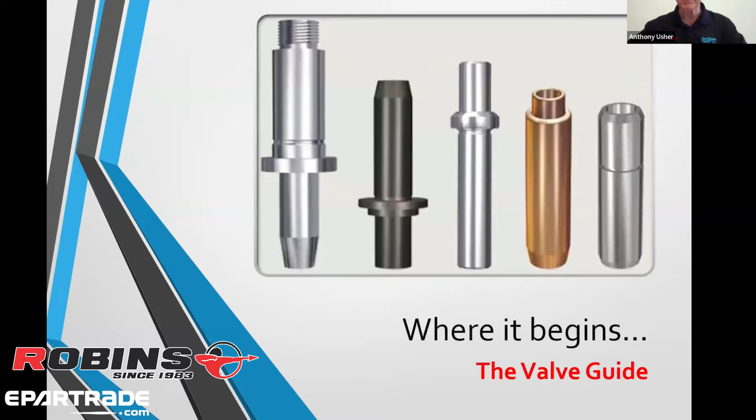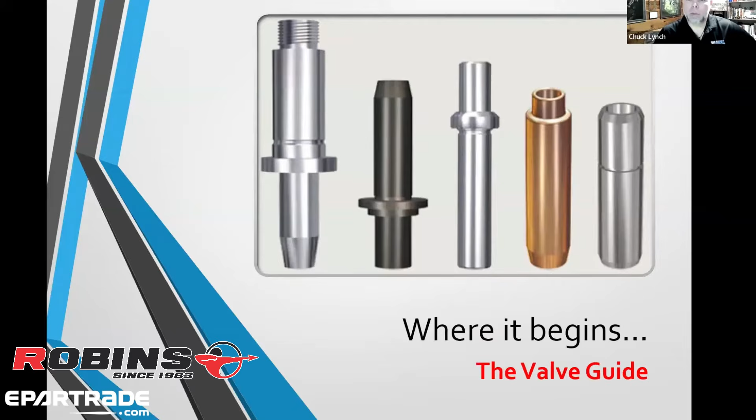Chuck, I think you know a lot about valve guides, and perhaps you want to get things started with a little explanation about the valve guide. Absolutely. So, as the title states, that's where it begins. We always have to have a datum point for anything we're machining, correct? And it cannot be more important to the longevity of the valve seat that the valve guide actually control that. You can't produce accurate valve seats if you don't have a very, very accurate guide to begin with.

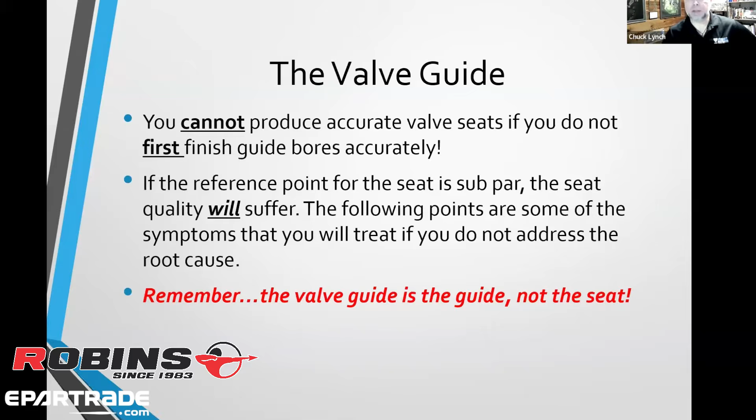It's the reference point. So many times in machining, we look at things like head gasket locating dowels, or the dowel pin that locates the transmission. There always has to be a reference point. The crankshaft center line is super important to the block. But when we think about the valve being able to seal combustion, we have to have that great reference point of the valve guide. So remember, the guide is the guide, not the seat. That's where we sometimes falter in our machining practices. We don't spend enough effort on making a good guide, so we go and cut the seat. The machines will cut the seat, but it won't be the reference we need, and then we can have excessive runout and so forth.

When machining the guide bore, it should be finished without any tearing of material, which means good tools. You do not want out of round or taper. The desired method to finish the guide is honing, because reamers just follow the path that they're given. So you bore or ream initially, then do the really close tolerance finishing. In all machining, like with crankshafts or camshafts, we rough grind and then finish grind, then polish or lap. That's kind of what you're doing with the valve guide when you do a finish hone. It's just truing up the surfaces, same as with a crankshaft housing bore.

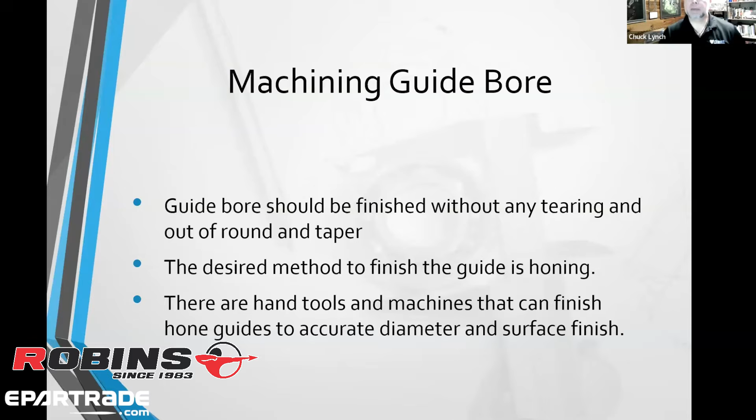There are hand tools and machines that can finish hone guides to an accurate diameter and surface finish. Anthony can definitely speak to that, since that's something they've put a ton of effort into in the past few years. Yeah, at Robins we've been working on developing valve guide finishing machines for quite a few years now, and we have a number of machines out in the marketplace with different types of engine builders using them. This particular machine shown in this picture is able to do all the different kinds of valve guide work.

Some people are oversizing existing valve guides by 4, 6, or 8 thou. Some heads don't have removable valve guides, so this machine is able to core drill out the parent material so that valve guides can be installed. And then, of course, the final process of honing the valve guide is done as well.

We have some users of this machine who are starting to use cross-hatch finishing inside the bore of the valve guides. We're hearing people are able to reduce the clearance between the valve stem and the valve guide because they're able to control not only the diameter of the valve guide, but also its surface finish. The less clearance between the valve stem and the valve guide, the better valve control, the better performance, and of course the longevity of the valve guide and valve stem.

Yeah, absolutely, because straightness is paramount. I know you've done a lot of presentations on cylinder bores, and we talk about measuring cylindricity. A bore gauge is a 2-point method. I can measure diameter, but I could never truly measure if that guide was banana shaped. That's one of the conflicts with just reaming, is that you can produce banana shaped holes. So imagine if it's banana shaped and I have a big long valve stem going through it, there are going to be points of contact.

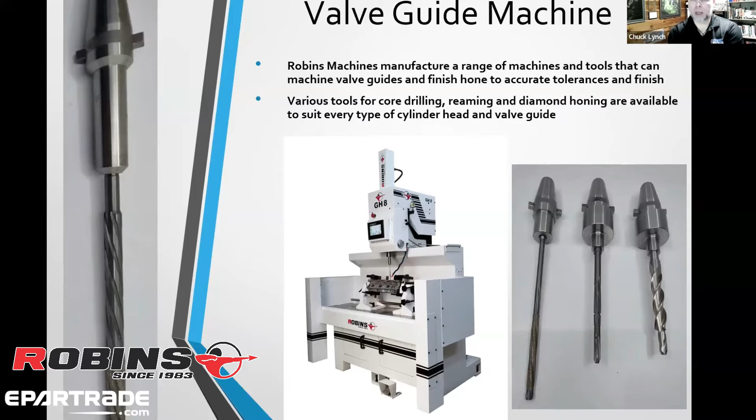Okay, well, let's go on and talk about the valve seat and some of the details on what goes on in the valve seat. Chuck, would you like to take this?

Sure thing. So the purpose of the valve seat is combustion seal. In the performance world, they take advantage of that with some very, very high seat angles, like 55 degrees. What that does is increase the wedging opportunity of the valve to the seat, which increases the opportunity to make a seal, a very fine line contact. But the downside is the valve can actually want to stick in the seat if the materials aren't matched. Again, that's very common in the performance world.

Secondly, you want to transfer the heat from the valve head into the casting. So going back to that guide, that's going to help you control the valve seat runout or concentricity, which is paramount in that transfer of heat.

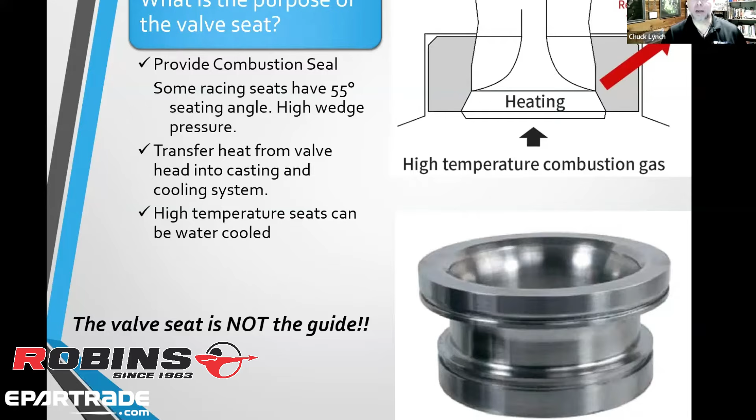High temperatures can be helped by having water flowing around the valve seat area. In that illustration, the red arrow is showing what would be like a water jacket behind the seat. So as coolant flows around that area, it exchanges heat with your cooling system. It's very important that you have good seat to valve contact, just as you should have very good ring to bore contact, because an engine is quite the experiment of thermodynamics. Every part that's getting hot has to exchange heat with another part.

So the valve seat, Chuck, we've got a little question, if you don't mind, if you can address it. Sure. What about triple angle valve seats?

Okay, so that's one of the things. It's about flow, about the breathing around the valve. The picture showing on the screen now kind of indicates the valve seating area. That's where the valve seat is going to contact against the valve, usually the angle we talk about, the 45 or the 30 or whatever. The other angles are more about flow, the airflow into the combustion chamber.

There's a lot of different recipes depending on the type of engine, the duty the engine's going to see, what service it's in. But many times, three angles is just a small part of it. We often have five, seven angles. When we go back and rework some of the OE stuff, we'll modify that, so we can end up with many more angles, but that's more about airflow around it.

Now you can also do things, and Andy will get to this later because that was one of the slides we do have ahead, multiple angles on the valve itself. Typically we're talking about the valve seat and multiple angles, but there are multiple angles ground into valves for some applications.

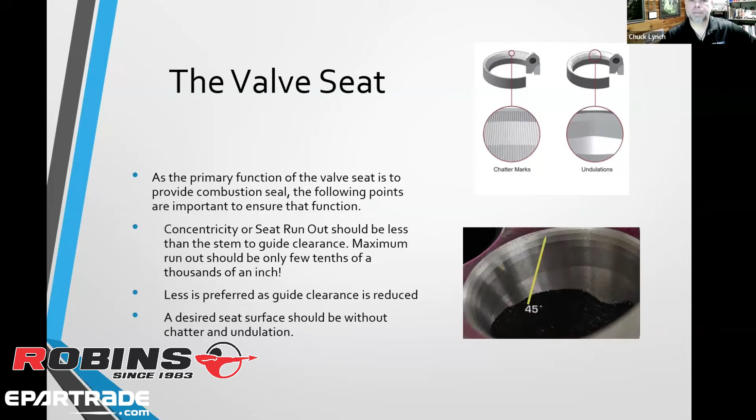Excellent, thank you. So this is something that's in my career, and I've been doing this for 30 plus years as well. Trying to move to a non-interference angle is absolutely impractical because we're relying on a valve manufacturer, relying on insert cutting bits or the tooling. There's just a stack up of too many tolerances. So it's proven that a half to 1 degree interference angle is the best option.

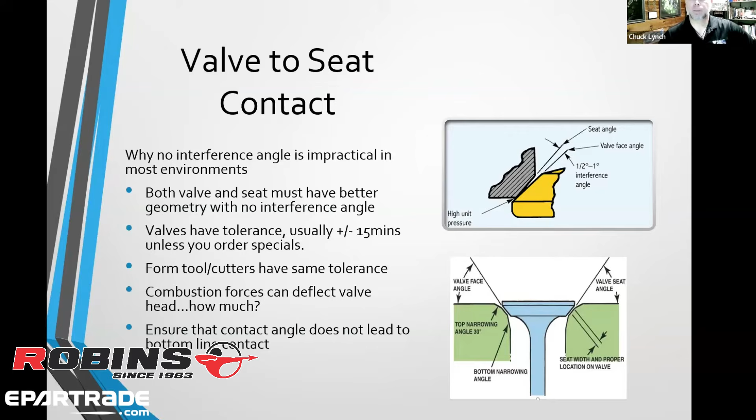Then you go to the next slide. And Anthony, you want to speak about that, or I can?

I have experienced many people who have broken valves or dropped valves, and they immediately blame the quality of the valve and accuse the valve manufacturer of producing a poor quality valve. But 9 times out of 10, when you start measuring seat runout, you find out the seat runout's the problem, and that's what causes the valve to actually break off. Absolutely, and that changes with the distance from the valve seat to the guide.

If you have more area between the valve seat and the valve guide, it can be tougher to machine the valve seat, and that translates into eccentricity or valve seat runout. And as Anthony was saying, then you have the issue with the loading of the guide and breaking the valve heads off.

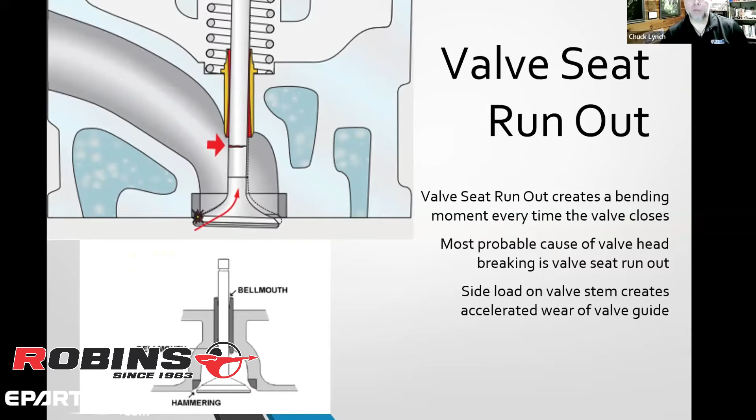And here's some equipment.

Chuck, you're so good at this. Why don't you explain these two ways of measuring valve seats and why they're both important together?

Okay, and as I share this, a lot of folks are familiar with Stephen Covey's 7 Habits, and one of those was synergy. Oftentimes one process is great, but you can take two processes and put them together and they're exceptional, right? So that 1 and 1 can equal 3.

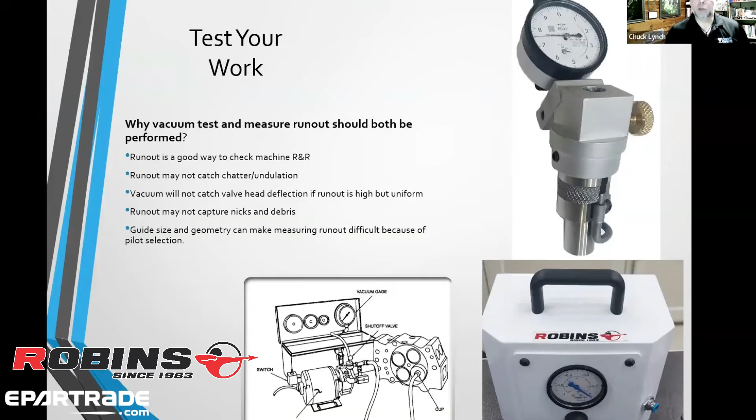But the valve seat runout - a good rule is you should never allow your valve seat runout or concentricity to exceed what your stem to guide clearance specification is. There used to be kind of the rule of 1 thousandth per inch of valve head diameter. Well, what's the valve head diameter got to do with it? That's irrelevant - it's stem to guide clearance, because going back to the shape of that seat and the valve contacting one another,

it's a wedge. So I'm going to say my finger is the valve seat - I'm trying to take two cone-shaped items and jam them together. So again, with that pressure, I can flex, with the springs and the vacuum force, and they can be disguised. So again, 1 plus 1 can equal 3.

The correct pilot for measuring valve seat runout.

Here is an example that Anthony's got to share with us. But if you see, that's actually got a straight area down toward the bottom of the pilot, and then there's a little bit of taper at the top. So it's 4/10 of a thou, less than a half a thousandth variation in that taper. But what that does is it locks that pilot in a guide. It makes it much easier to check the valve seat run out. Anthony, you want to speak to that some more?

So I had a little glitch with my computer. Can you hear me okay? Yeah, we can hear you fine. Okay. We can't see you, Anthony. We can hear you, but we can't see you. So okay, keep going. It's okay. Oh, you can't see? Yeah, we can't see you anymore. But we can see your screen, so you're fine. Keep going. Okay, good. Sorry, something happened.

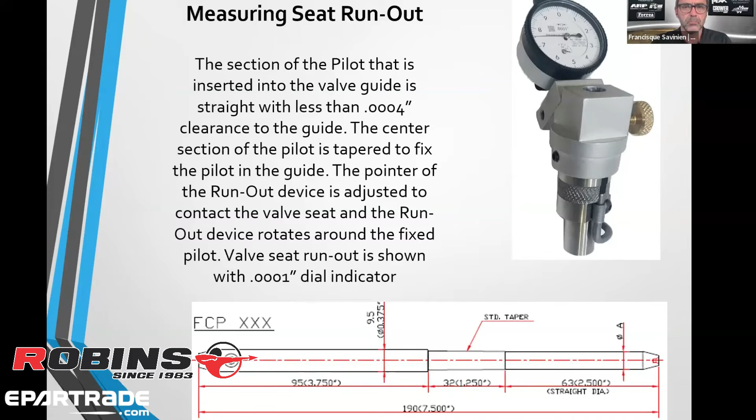Sorry, can you still see the presentation? Absolutely. Yes.

Okay, so we'll get on to valve seat machining challenges. And Chuck, would you like to run with this screen? Sure. So when it comes to using the form tools, because some people are still grinding valves and valve seats with the traditional methods with the grinding wheel. But when we talk about the valve seat machining challenges, poor cutting insert sharpening can produce poor seat quality. And what they tend to do is actually kind of chip and fracture. So you get what looks like lines that are in the seat.

Well, if we think about how hard that valve seat is, I'm trying to create a seat width that's, say, 1.5 millimeter or 60 thousandths wide. But if I have chips in the cut, I have that raised material, I might be only contacting the valve against an area that's, say, a quarter of a millimeter or half a millimeter, so 10 to 20 thousandths wide. So you have to really consider that and look at the condition of the seat after the machining.

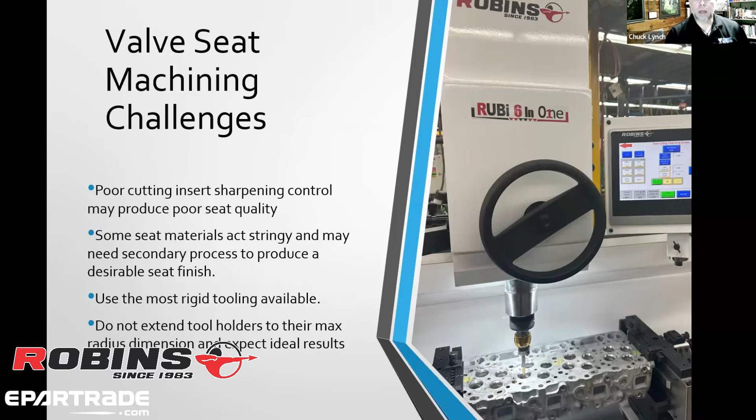You want to use the most rigid tooling available and do not extend the tool holders beyond a max radius dimension. So a lot of times folks will say, well, I don't really have the tooling that I need to do this next biggest size seat, so I'll just extend that thing out, and you start to lose rigidity. And that's where you start to get chatter and deflection. And that's not going to end up as a good valve seat. So it may vacuum test fine, but ultimately it doesn't transfer heat well, and you're going to have failures.

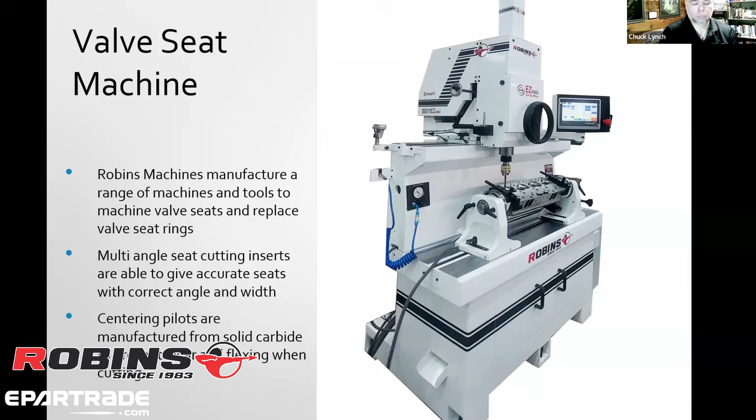So for Robins Machines, we represent a line of machines for various different applications, very small cylinder heads, single cylinder motorcycle cylinder heads, and various applications of production machining. This particular machine shown in the picture here is a high production machine. It's able to machine valve seats in just a couple of seconds. It's programmable and cuts the seats automatically. And again, the most critical thing of the whole seat cutting process are the carbide centralizing pilots.

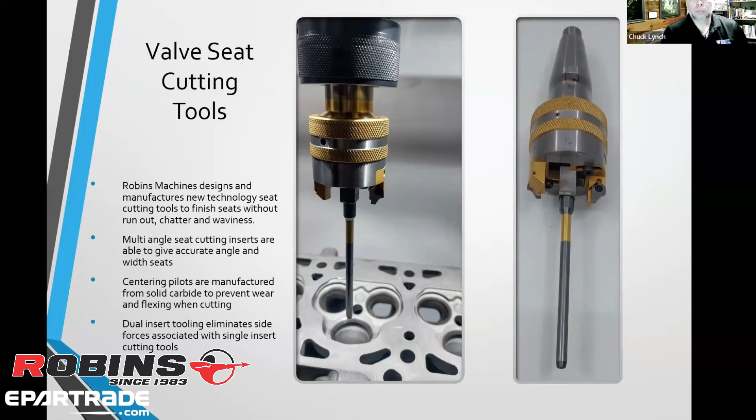I have seen in manufacturing situations where they're pre-manufactured cutter heads with three inserts. But our system has to be universal, so we can machine valve seats from 3/4 of an inch up to 3.5 inches, and we need adjustability for different diameters and different size valve seats. Right. That's what I was going to mention as well, because a couple of projects I've been involved with where it's dedicated to one seat size. Yeah.

Okay, let's go on to the actual valve itself and some finishing there and the different angles in the valve that Chuck mentioned earlier. Chuck, would you like to go ahead? Sure. So the valve seat part of the valve should be finished to accurate surface finish and a minimum runout. Again, manufacturing, they have specs and tolerances as well. They tend to shoot for under 2 thousandths. Again, we would like to see much less than that. The stem end of the valve should be perpendicular to the valve stem. The tip has to be definitely perpendicular.

Different angles can be ground on the valve seat, and this goes to what we were talking about earlier. Not only can you do three angles or whatever on the seat, you can do a lot of these even on the chamber side. There can be some benefit to delipping, or they used to refer to it as camming the valve. So there's definitely opportunity to do that as well.

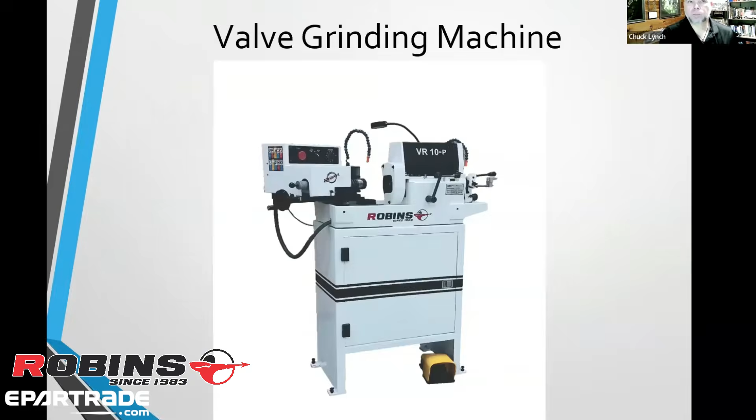Again, valve runout, a similar picture we showed earlier, valve runout itself can also create valve head breakage and seat runout. Absolutely. This is a machine that we offer, Robins valve grinding machine. It has a precision chucking system where it holds the valve stem with 6 precision steel balls, and we're able to regrind valves or refinish new valves to within a 10th runout.

Well, let's go on to talking about cylinder head gasket surface machining and finishing, and the 3 pertinent factors of this, which is surface roughness, surface flatness, and waviness. We're seeing more and more people requesting these kind of measurements after cylinder heads and cylinder blocks have been machined. And Chuck, I'll hand it over back to you.

Sure. So with modern gaskets, MLS gaskets, they're all stamped steel, so they don't have the soft materials that are accommodating of roughness and waviness that we used to be accustomed to with conventional style head gaskets. And those gasket types are out there, but by and large, from an OE standpoint and even in high performance, we've moved to MLS gaskets.

So can you go ahead and advance, Anthony? Back one. There. Yeah.

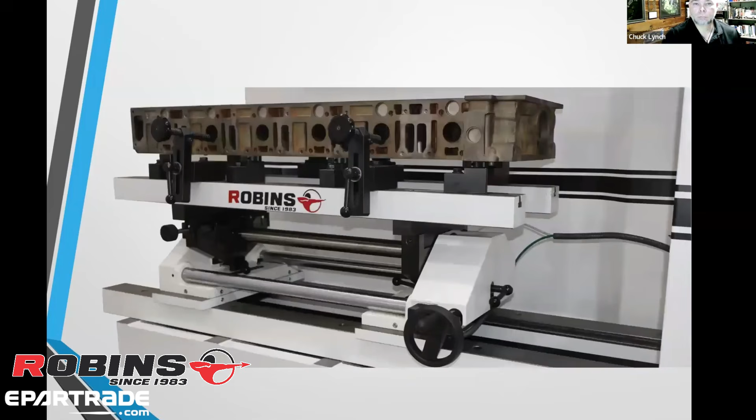Just to finish off this section, this is an example of a modern surfacing machine. It's been developed with specific bearings, spindle design, precision ball screws, and thrust bearings so that factors like waviness are very small and very accurate. As mentioned, for setting up cylinder heads, this is a close-up picture of a fixture, showing the number of supports and clamps to hold the cylinder head rigidly for machining.

Well, that wraps up our presentation, and I'm sure there's some questions. Sorry about the glitch from my side, but at least we got through the presentation.

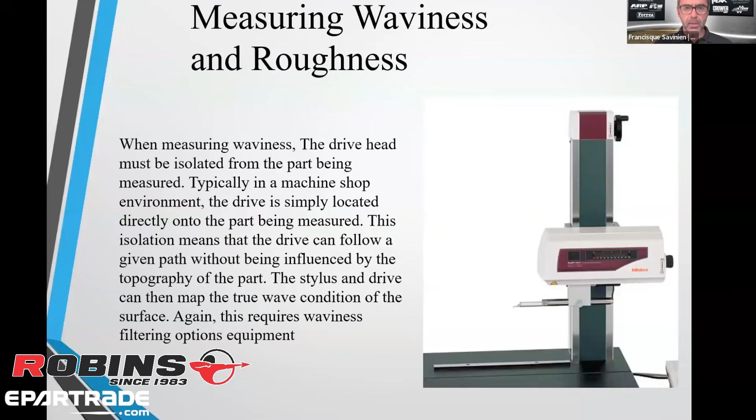First, let's go back to the last question: was the dimension 0.8 millimeters a few slides back? Let's go back - I think that's the waviness indicated. Yes, it was 0.8 millimeters, about 30 thousandths. So that's about the thickness of your fingernail. If you look at that bottom left image and start to see tiger stripes at a frequency of about 30-32 thousandths in length, they start to become a problem for the gasket to conform to. So the dimension, from Brian's question, is 0.8 millimeters.

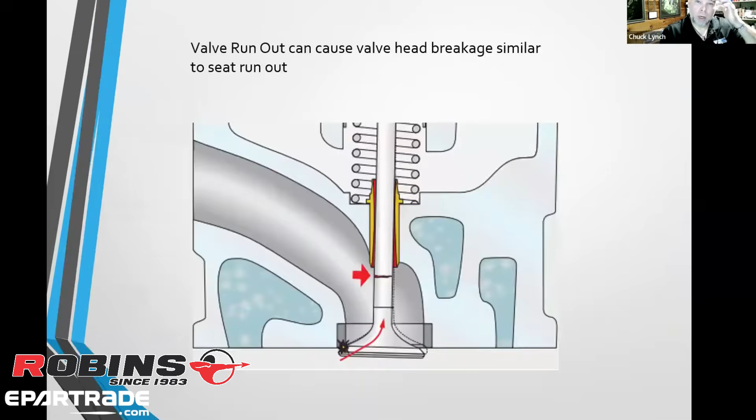We had a question earlier from Dean Crawford: which cutters would you suggest for exceptionally hard valve seat inserts? Are you referring to the cutting insert? Correct, I think that's because of the work hardened valve seat. So like your Rubi Hard inserts, Anthony. Yes, that's a good example for those, and I've been involved in some testing with those as well. That's exactly why they were requesting those - because with work hardened seats, they didn't necessarily want to have to extract and replace them.

As you know, the old saying, iron hardens iron. Well, when an engine's running and you see those temperatures, sometimes you have a work hardening condition. So you have a valve opening and closing many cycles per second and peening against the seat - depending on the materials, sometimes the seats just get really hard, or sometimes they fail. It depends where you are along that. Sometimes you can cut through that hardened layer and get back to the original hardness of it. Sometimes they've just gone too far.

But Anthony, you guys have had some quite good success working with work hardened seats on things like the Duramaxes, right? Yes, we're getting very good results with this new Rubi Hard product, specifically on some of the diesel turbo seats, which really work harden. This new carbide is able to cut those very reliably with a long life as well.

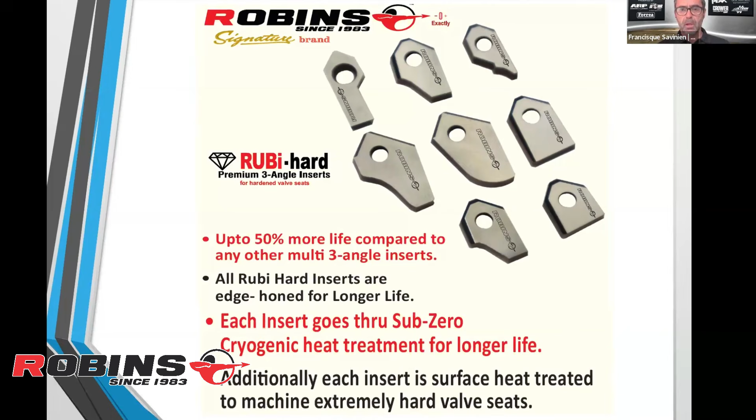Okay, excellent. We're getting close to the end. One last question from Brian: your slide shows 0.30 - should that be 0.030? I'm thinking we're talking about this question earlier, about the 0.8 millimeters on the slide. This slide here? Yeah, okay. Correct, that's correct. Okay, excellent.

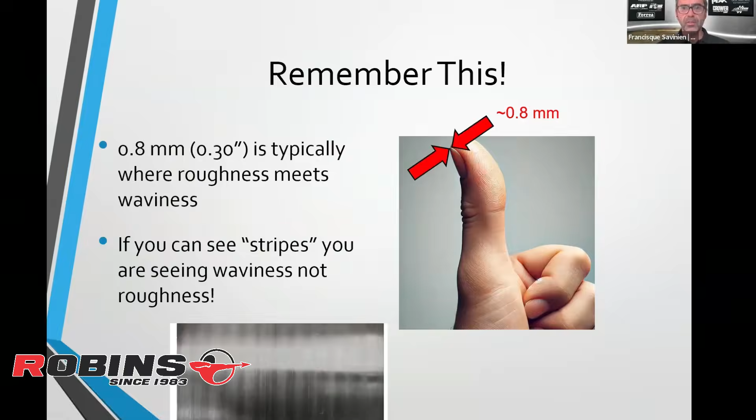Very good, so I think I see Judy popping up, which signals the end of the webinar. We lost Anthony's video - good news is we were able to see the presentation and hear his voice, but we can't see you on screen, Anthony. I'm sorry, I'm not sure exactly what happened.